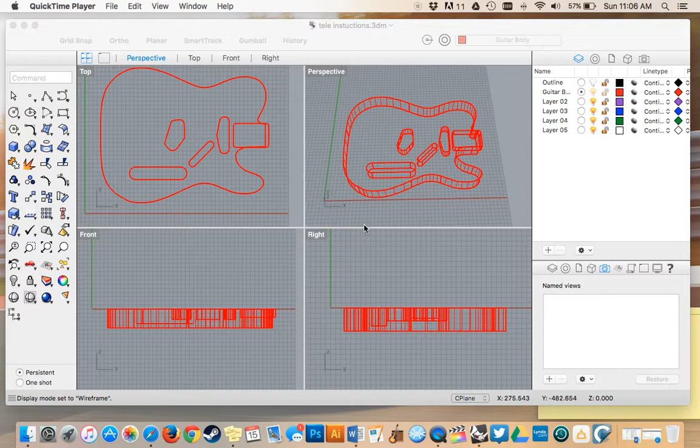Alright, so today we're going to go over how to fillet an edge. I'm just going to zoom in on perspective view here.

We're just going to go over what a fillet edge is. As you can see here, we have a surface on the top of the guitar, a surface on the side of the guitar, and a sharp 90-degree angle here. Basically, a fillet is going to allow us to create a nice smooth surface between these two surfaces.

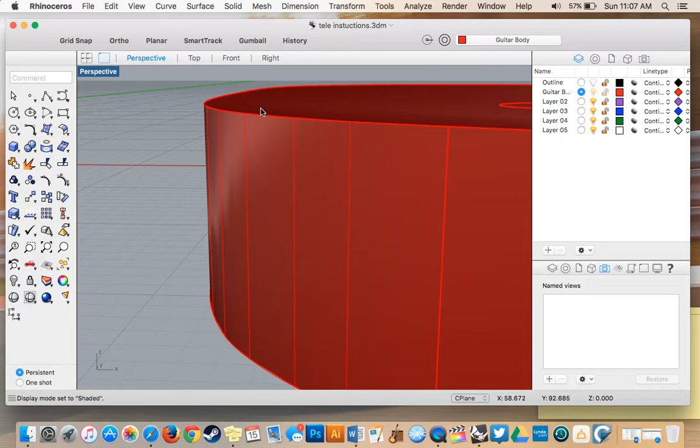Before we get started, there are some problem areas we're going to encounter. I'm just going to zoom in on the bottom here. This is a very sharp angle of the guitar, and one important thing to keep in mind when filleting is that we can only fillet an edge that has less of a curve than this 90-degree angle. So we'll have to make our fillet very small in this section.

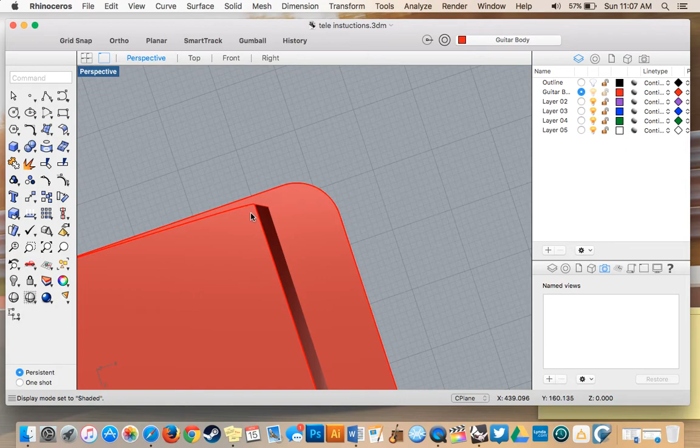In contrast, sections like this have a nice sloping curve, so those won't be a problem.

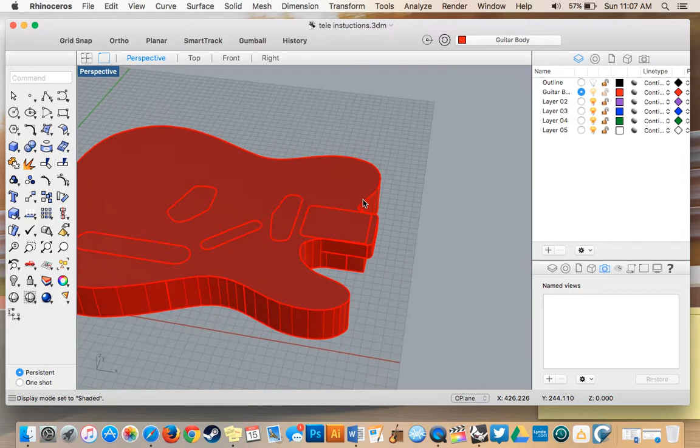Let me zoom out here. For the top section, I'm just going to quickly Boolean split this out so we don't have to worry about these 90-degree angles. There's a whole video series on how to do a Boolean split, which will be in the next lesson, so I'm just going to do this quickly without explaining the process.

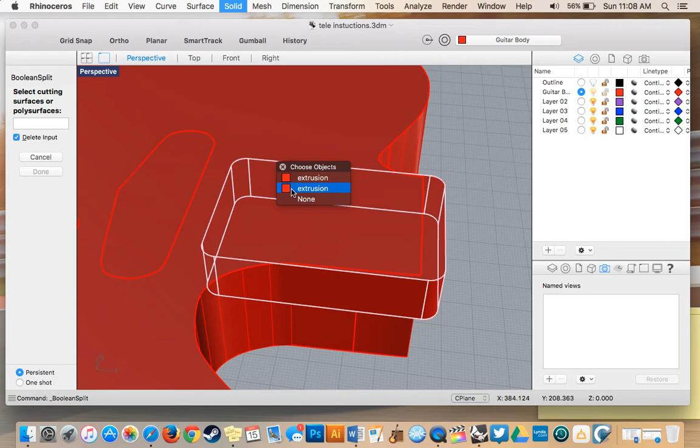Alright, so as you can see now we have a perfect neck pocket for our neck to sit in. Now we can get on with the fillet edge.

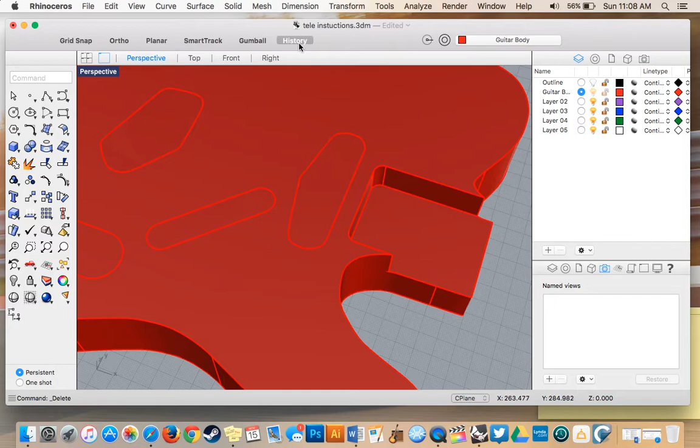So this is a solid and not just a surface, which means it's not hollow inside. So I'm going to go to the solid tool.

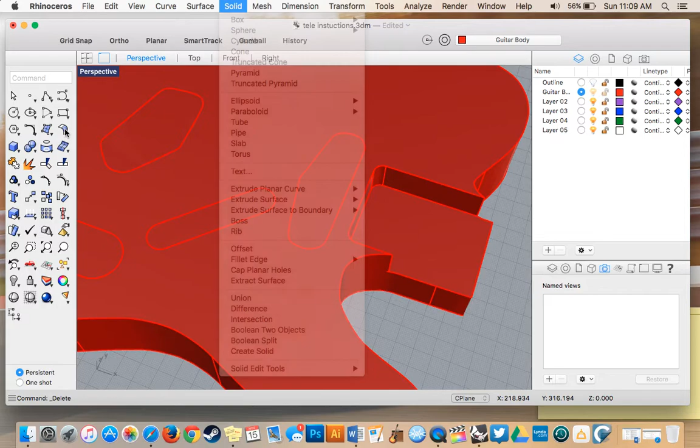Fillet edge is here. Fillet edge gives us that rounded edge, while a chamfer gives us a straight cut edge. If you ever can't find something, you can go into help, type in fillet, and go through until you find it. It's also on the sidebar here if you want to look through that - you can hold it down, find fillet surface, and go down until you find fillet edge. I generally like using the one up here, though, since I find it the easiest to navigate.

One thing that's important when doing our fillet edge is our radius right here. This is the measurement in millimeters of how many millimeters it takes to complete that fillet edge. Through trial and error, I found that 10 millimeters is about the right size for a Telecaster, so we're going to go ahead and use that.

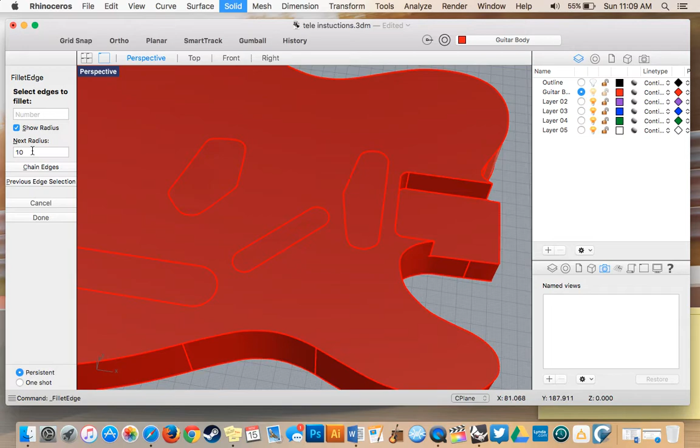Now I'm just going to select done. And there again, fillet edge. I'm going to go through and select all of the curves that we want to complete the fillet on.

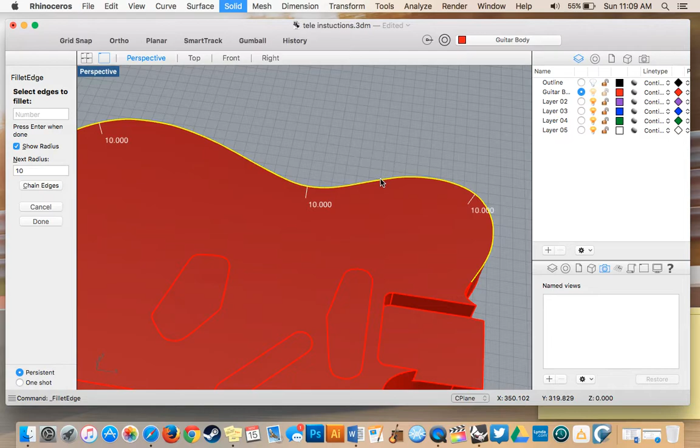If you're ever going through and select something you don't want, like this here, you can just hold command down and select it again, and it'll deselect that.

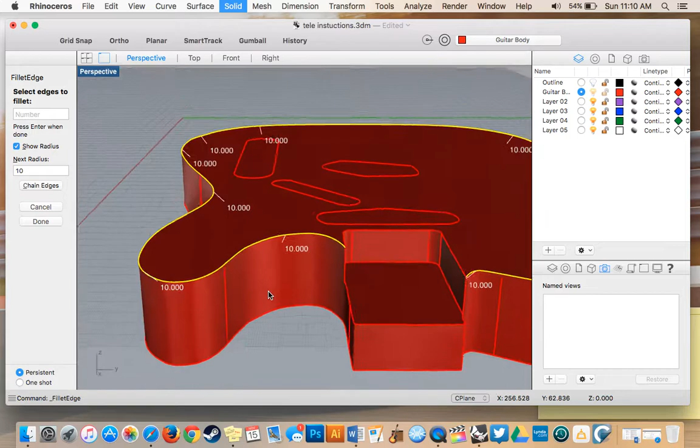It's very important that you get every section of the guitar. So I'm just going to go around, make sure I have all of the corners that I want to fillet selected. I believe I do.

Select done, and it'll bring up another drop-down menu. This gives us some more tools, like adding handles that we're going to use on the bottom, and previewing it. Trimming and joining is very important - I'm going to talk about that in a moment. And it has the rail type, which is the fillet type we're completing.

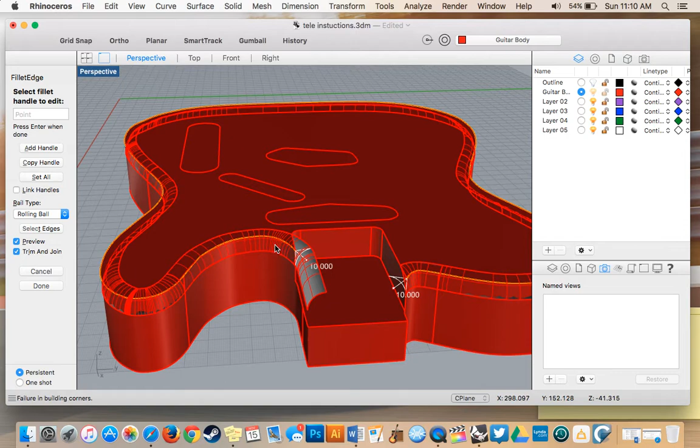There are a couple different options here for the fillet we're going to complete. As I change it, we get some different options, but when I go to rolling ball, we get an error in our fillet here, because it's trying to fillet an edge that is no longer there. So we're just going to keep it in distance between rails, because it makes this the end point of that fillet. So I'm going to go ahead.

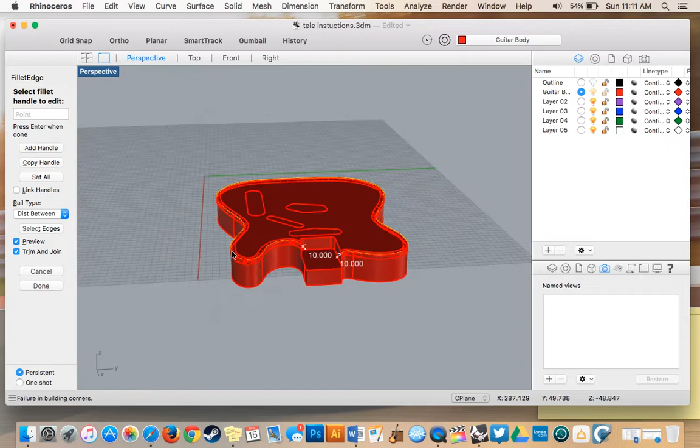Quickly, I'm going to talk about trimming and joining. Just going to zoom in a bit here. When we select trim and join, that tells Rhino that once we complete this fillet edge, we no longer want this section of the extrusion up here. So make sure trim and join is selected.

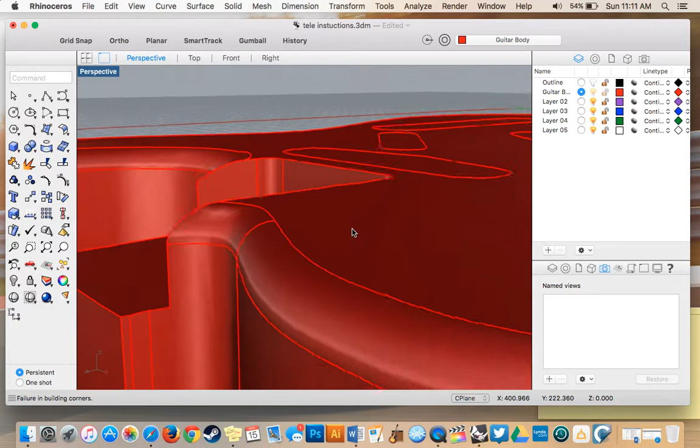Hit done. And now we have a nice filleted edge all the way around. I'm just going to go around and make sure there were no errors in it.

So I think that looks pretty good. Now I'm going to flip around to the bottom half of the guitar here.

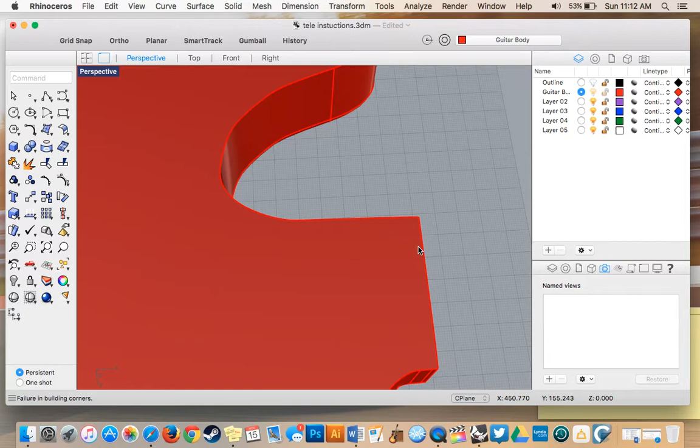This one's a little more complex on the bottom because we have to work with this sharp 90-degree turn here. It's going to take a little bit of time and trial and error to get this where we want it to be. So I'm going to zoom back out.

It's going to be the same process up until the very end. So, fillet edge, go around and select all of the edges here.

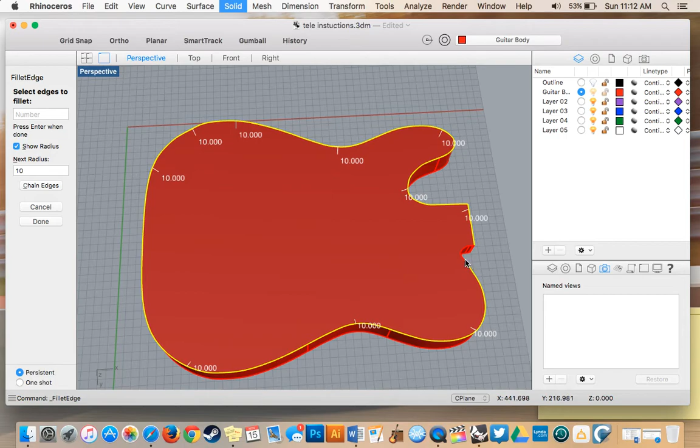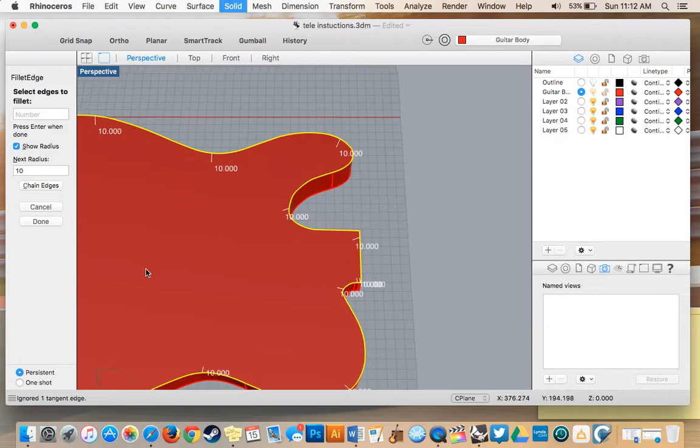I'm going to zoom in on this section here, because I can see there are a couple surfaces. So I do this and we're left with 1, 2 surfaces still. Make sure I select that there. I'm going to keep the same fillet of 10 millimeters, so I'll select done.

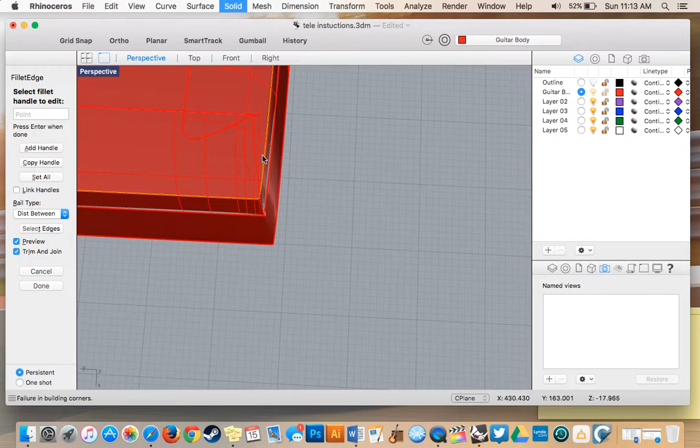I'm going to zoom in on this section here. You can see there are a lot of errors in this section. The fillet is kind of folding over, and it's because we're trying to create a fillet with a sharper angle than this corner here. So we're going to have to do something called adding rails to this fillet.

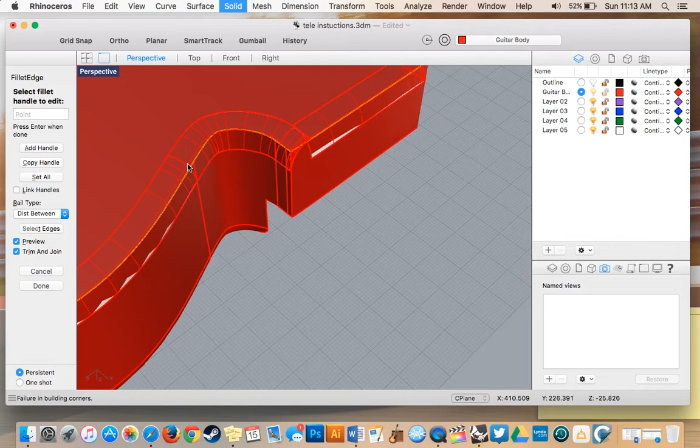Just going to get my angle just right. Alright, so what adding a rail, or a handle, does is allow us to add handles along our curve, and we can change the radius of our fillet edge along those handles. So we can make this curve a lot smaller than 10 millimeters, and we shouldn't get that error after we do that.

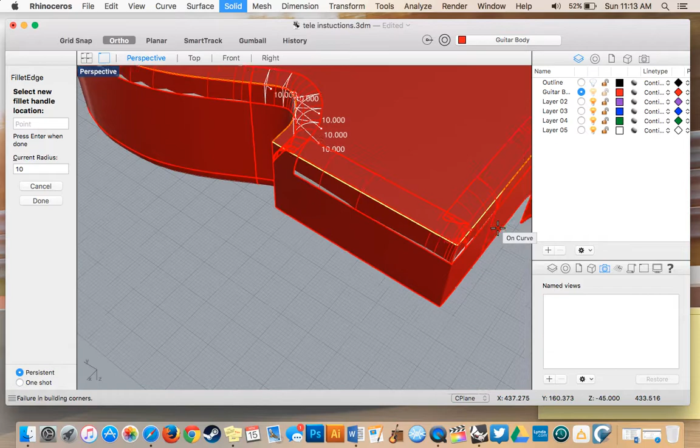I'm going to go through and add our handles.

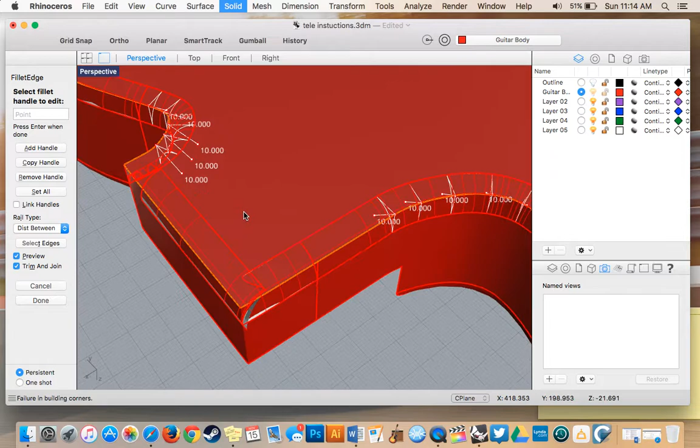Alright, so now it's important that our last handle stays at 10. If we change this one, the fillet all the way around will change. So I'm going to go to the second-to-last handle, and I'm going to change this from 10.

I'm just going to show you what it does. I'm going to try 6 there. As you can see, our fillet got a lot smaller. It went down to 6 millimeters.

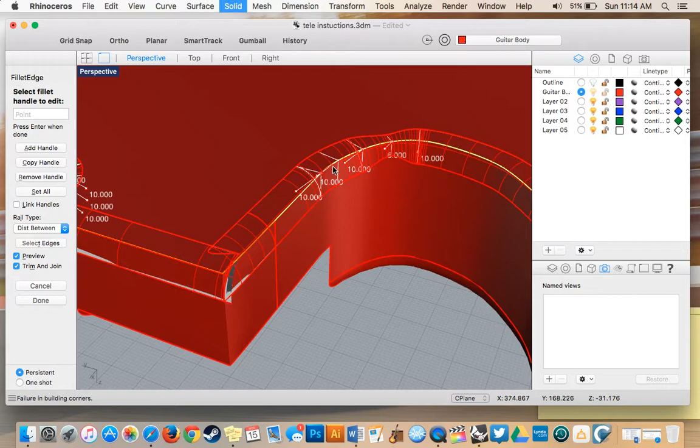So I'm going to do that all the way around and try to blend it into the edge, and we're going to have no fillet here when I'm done. You go through and select this little snap point on the fillet, and you can do it manually, you see here, or you can just type it in. I think it's a lot better to just type it in. You get a more precise measurement.

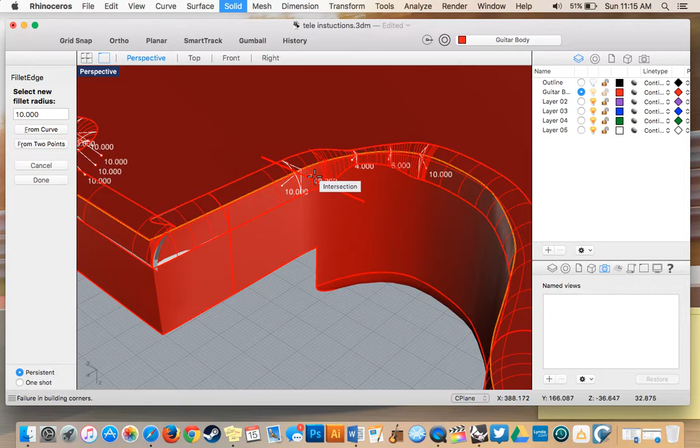So I did the last one at 5. I'm going to do this one at 4. And slowly moving down... 2. And this one has to be virtually 0, so I'm going to make it 0.001.

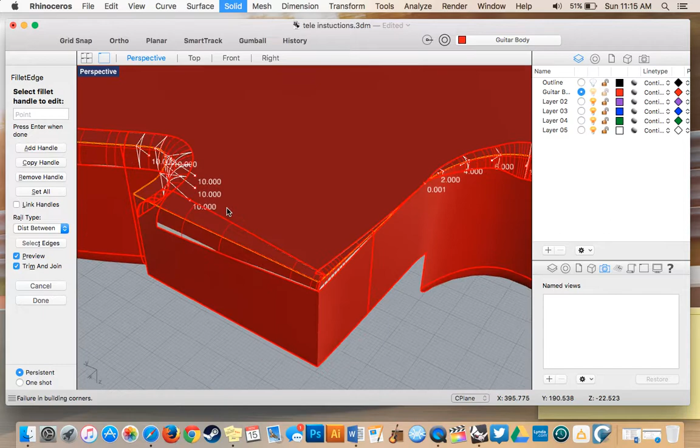Done. Now it starts here, but it slowly starts moving back up until it gets to 10 on this section over here. So I'm going to flip around.

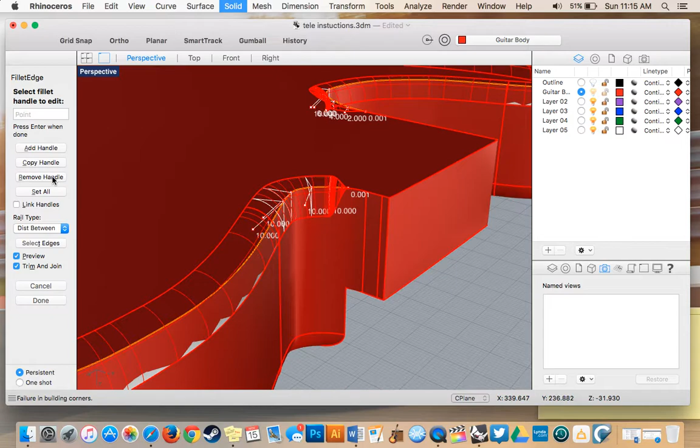So this is my next handle. I'm going to make this 0.001 as well. Now we got rid of that error in between. This is a very, very small fillet all the way around, so we shouldn't get that error anymore.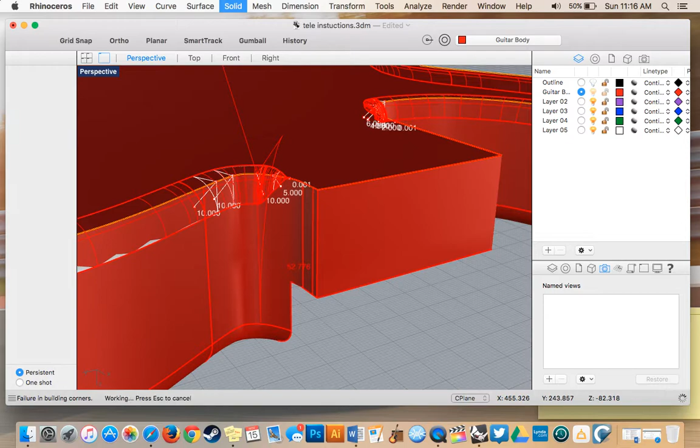Now I'm going to just blend the rest of these in together. So I'm going to do this one at 5. Six. And 8 here, see how that looks.

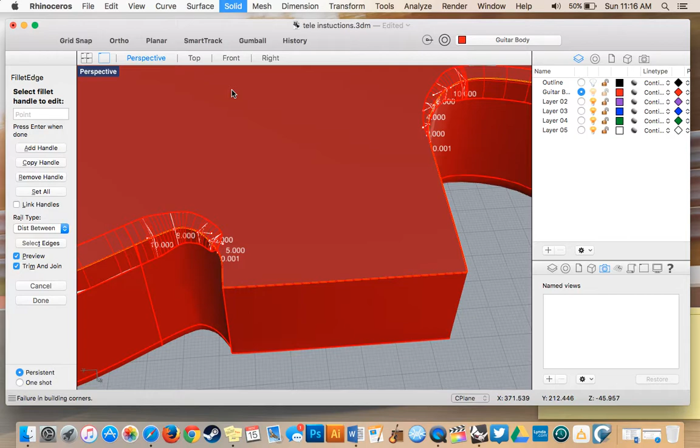So I think that looks pretty good. And for our final thing, we're going to sand this down a bit when we're actually building the guitar, and there's going to be a plate sitting over here. So I just want to make sure everything looks right. I think that looks about what we need it to look like. So I'm just going to go ahead and click finish.